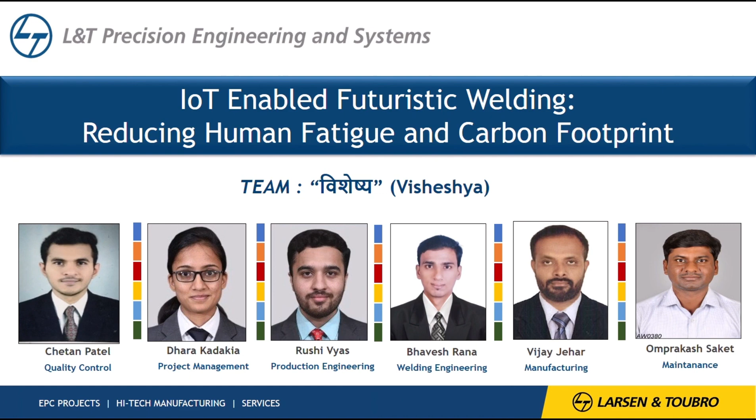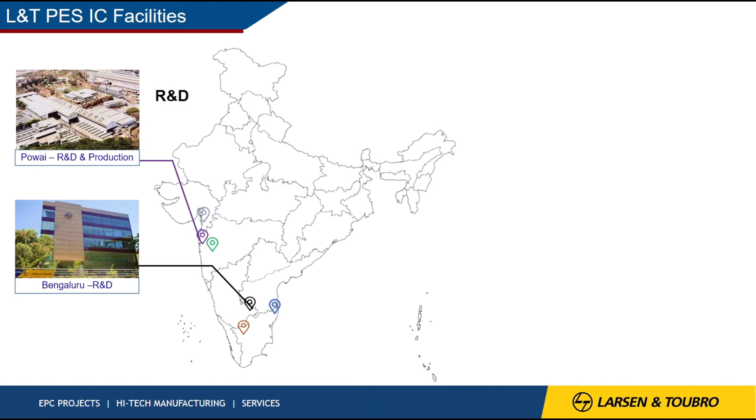issues. L&T is a professionally managed multinational EPC, which comprises multiple business verticals across many domains. Some of them are infrastructure, energy, high-tech manufacturing, information and technology, financial services and many more. L&T is majorly held by public institutions and has generated revenue of 26.7 billion United States dollars in financial year 2024. L&T Precision Engineering and Systems IC is located across pan-India locations.

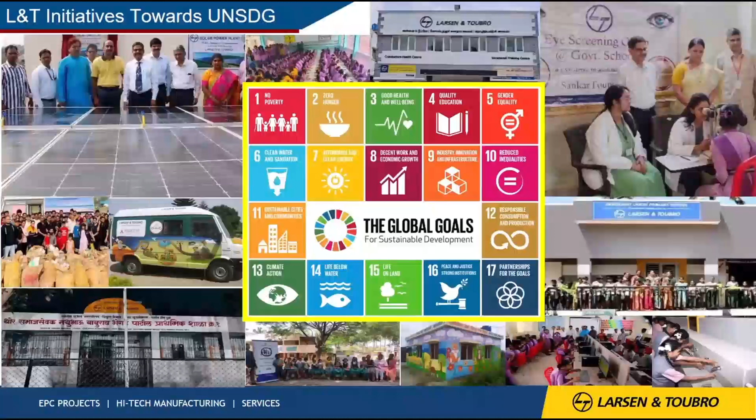Our team is from Hazira, situated in Gujarat state, which is the largest manufacturing plant of L&T in India. L&T contributes widely to the social and governance causes, adopting various practices in order to uplift the community at large. We are also targeting to be water neutral by 2035 and carbon neutral by 2040, thus representing our commitment towards our vision of building a sustainable environment.

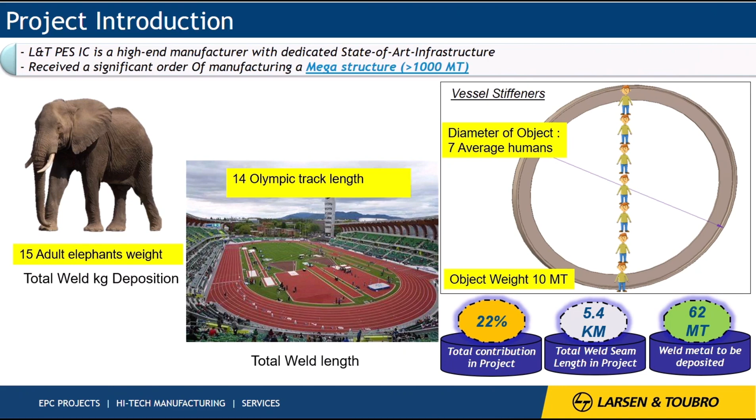We have targeted 3 sustainable development goals by executing this project, which are good health and well-being, industry, innovation and infrastructure, and responsible consumption and production. L&T Precision Engineering and Systems IC is a high-end manufacturer with dedicated state-of-the-art infrastructure. We had received a significant order to manufacture a megastructure, whose weld quantum is equivalent to 15 adult elephants, comprising a total weld length equal to 14 Olympic track lengths.

The T-ring vessel stiffeners are the main load-bearing members of the structure. The major task here was to perform welding of vessel stiffeners. Using the conventional method of manufacturing for 200 stiffeners, we would have required 1,650 days. This may have caused issues like dimensional inconsistency, high manual interventions, high probability of rework, and delivery delays due to non-value-adding activities like chip-back grinding and the requirement of highly skilled manpower. The core target for the team was to obtain necessary customer approval for the implementation of a new methodology and reduce the cycle time by 30%.

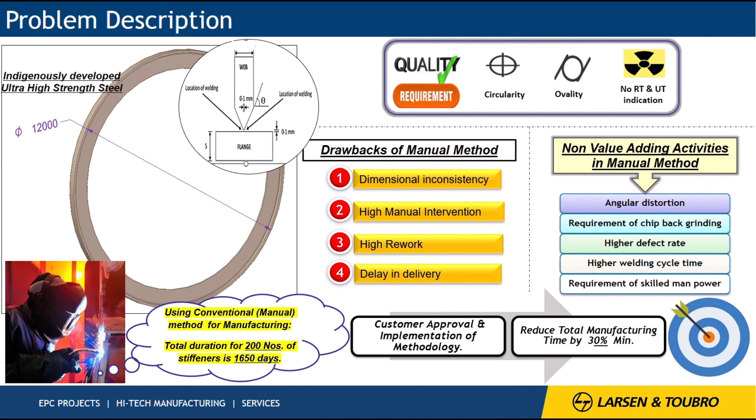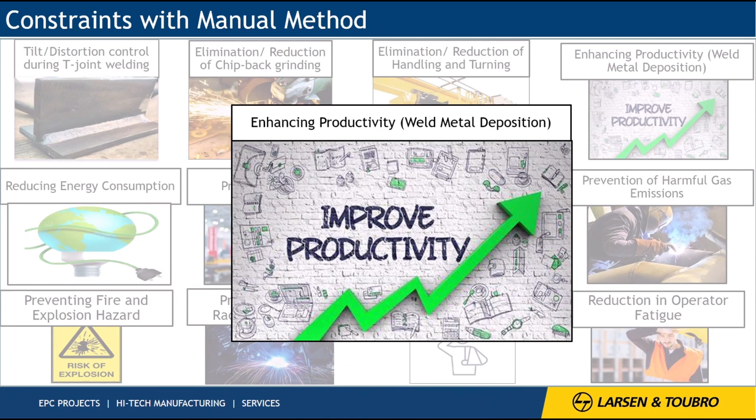The constraints of the manual method of manufacturing are: inconsistent weld deposition leads to abnormal tilt and distortion of the stiffeners. Root gouging is essential and leads to a higher cycle time. It requires back and forth turning to perform sequential welding on both sides of the T-joint. Hence, day-to-day productivity targets cannot be achieved. Performing preheating using gas burners consumes more energy. Skilled welders are required to eliminate chances of rework, hence process de-skilling is not possible. It is also not possible to control the process remotely with manual welding.

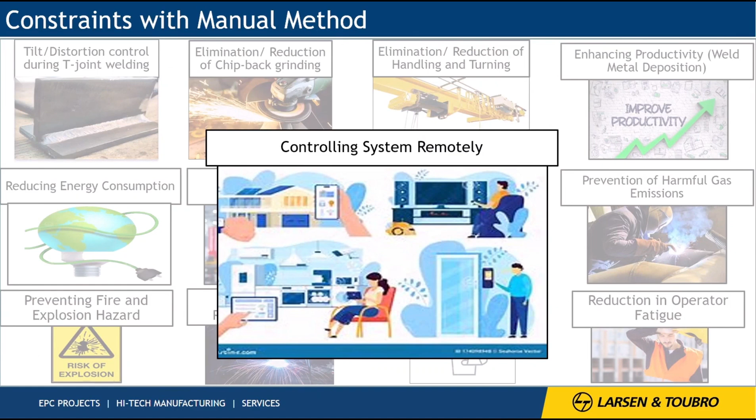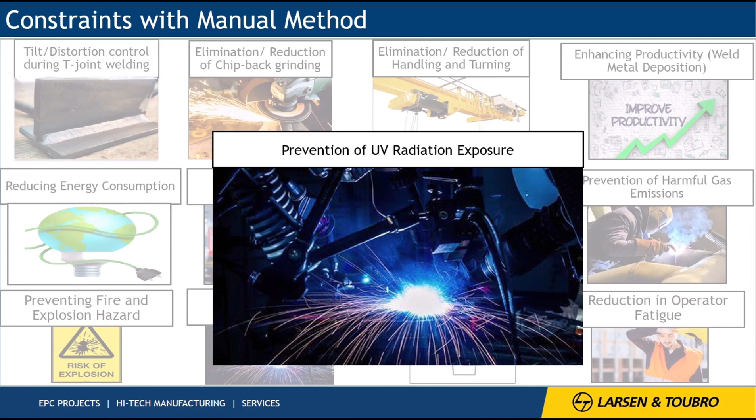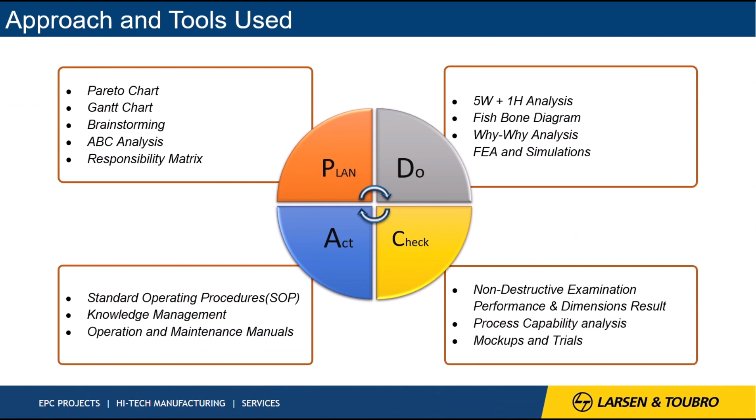This leads to the emission of harmful weld gases. Continuous preheating carries the risk of gas explosion. The manual method of welding exposes workers to UV radiation. The involvement of physical presence may lead to human injuries, and higher operator fatigue due to continuous contact. Attending all these issues was a complex task. To cater this in a structured manner, we adopted the PDCA approach.

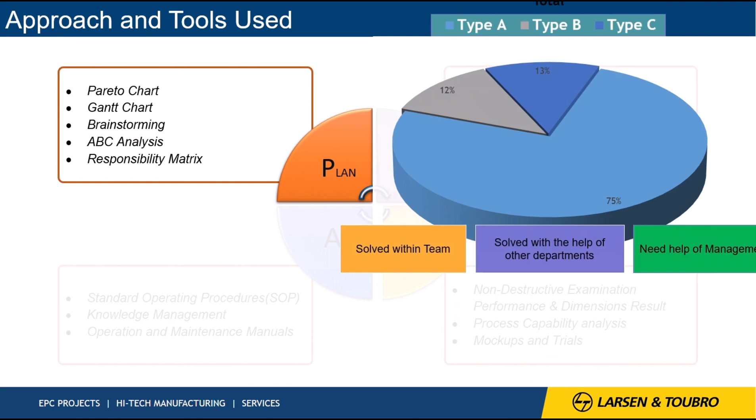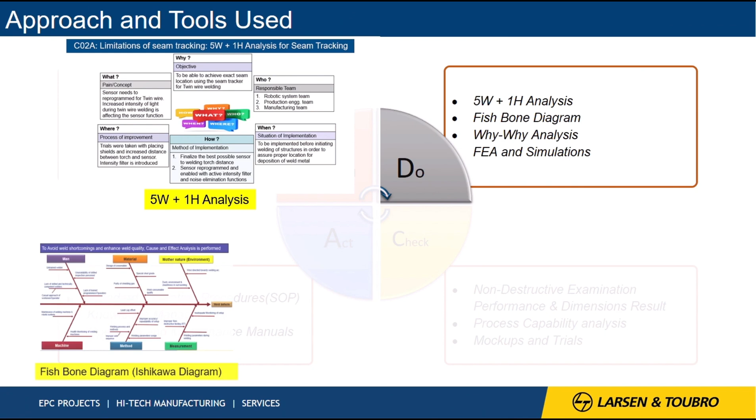In plan phase, we used QC tools like Pareto, Gantt chart and brainstorming, which enabled us to focus in the right direction. Further, tools like ABC analysis and responsibility matrix narrowed down our interest. In do phase, we used tools like 5W+1H analysis to find out limitation of seam tracking. Fishbone diagram was used to identify root cause of weld shortcoming. Why-why analysis was used to eliminate concavity and reinforcing welding requirements. FEA analysis was implemented to validate the structural design.

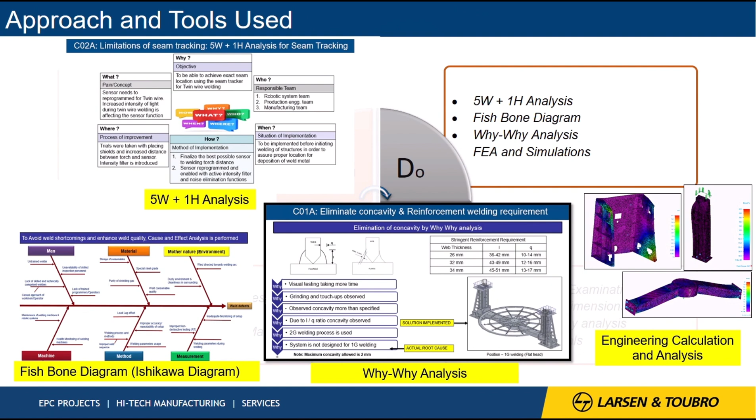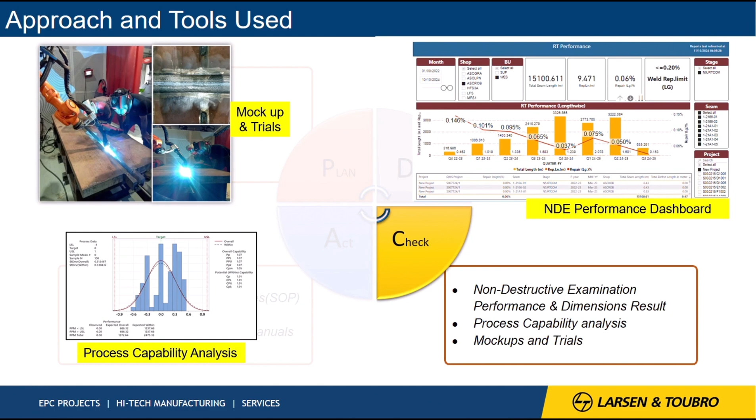During check phase, we measured the NDE performance and progressively performed mock-up trials. We had also performed process capability analysis to ascertain performance of our proposed solution. Under the act phase, we had prepared standard operating procedures and processes to sustain best practice to be followed. Our team focused on reducing carbon footprint and minimizing human fatigue.

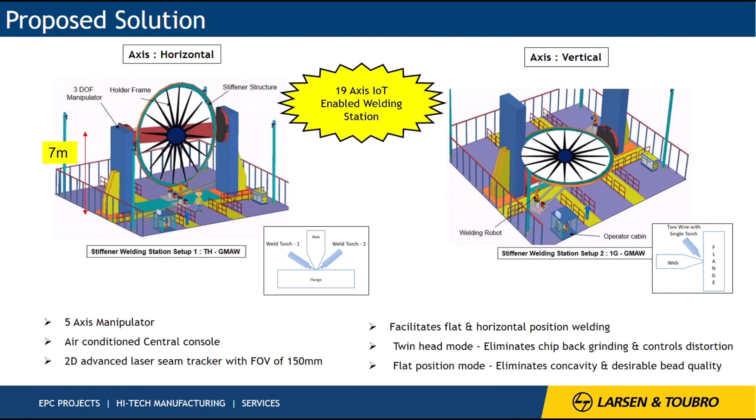We identified challenges with gas metal arc welding and, after extensive brainstorming, designed a special-purpose machine with advanced features to address these issues. This machine is known as Twin Head Tandem Gas Metal Arc Welding System. Let us see the reasoning behind this name and delve into the unique capabilities it offers. The entire system is designed by in-house team of Larsen and Toubro. Aligned with the UN Sustainable Development Goals, this special-purpose machine features a twin-wire process to increase deposition rate and reduce cycle time.

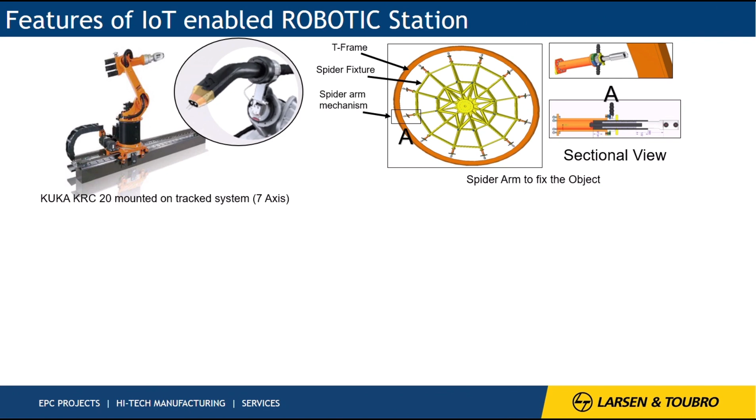It has a spider arm fixture for handling large objects up to 12 meters in diameter with precision and safety. Additionally, it includes a 2D laser tracking system and HD cameras for remote monitoring, enhancing precision and protecting operators from UV radiation. This system features a dedicated control cabin for remote operation by a single operator, enhancing safety and comfort. Advanced analytical tools streamline monitoring and decision-making.

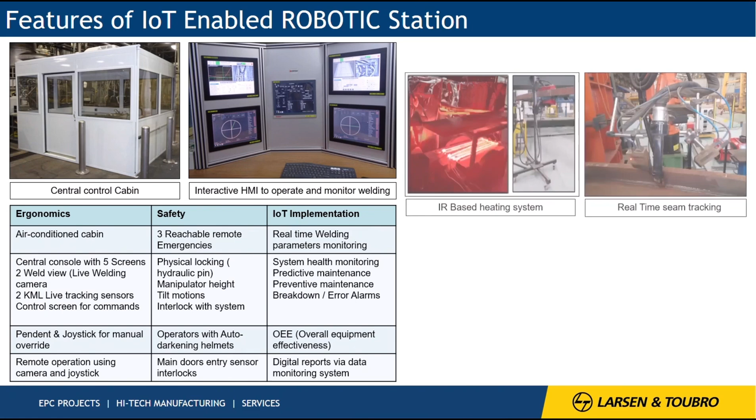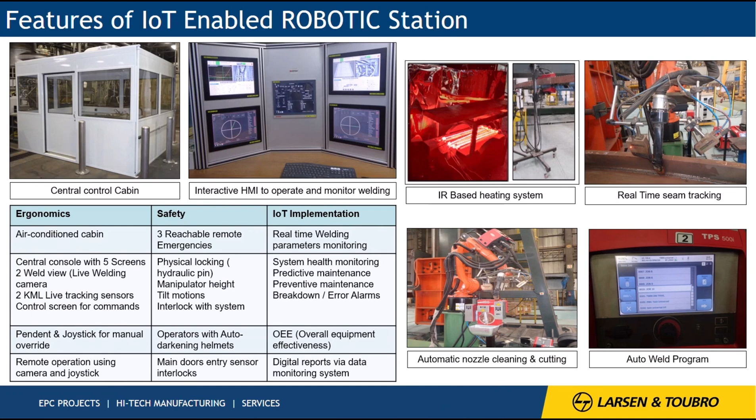To reduce carbon footprint, an electricity-based infrared heating system replaces traditional gas methods, aligning with UN SDG objectives. Automated cutting and grinding processes further improve safety and efficiency by eliminating manual intervention in hazardous tasks. L&T is proud to be the first in India to develop such a unique and advanced system.

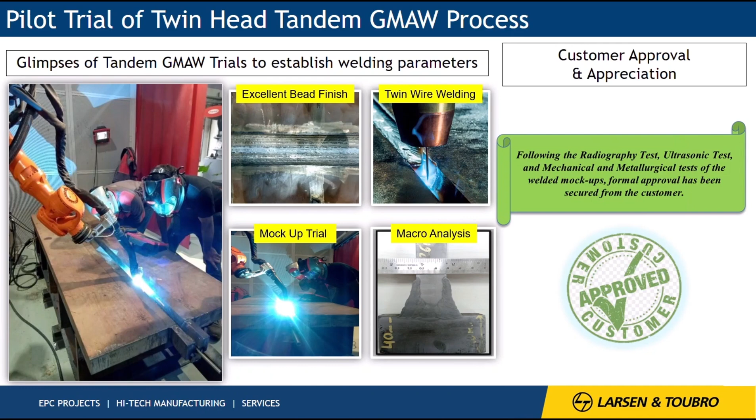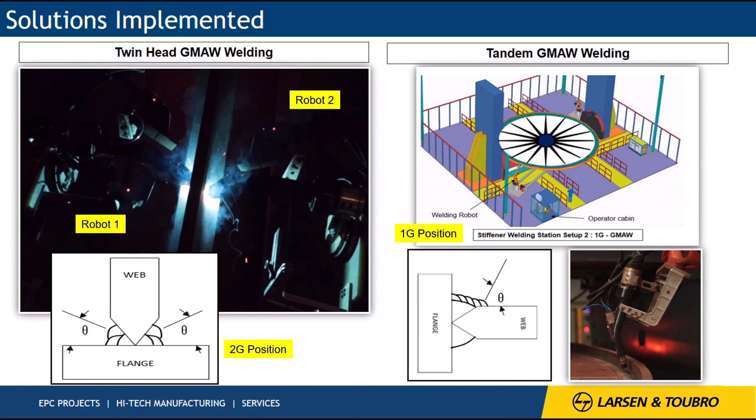On the right, a flat position welding setup is significantly boosting productivity. The entire system can handle and rotate large objects within minutes, hence dramatically reducing human effort. It is important to highlight once again that the system is operated remotely, minimizing human fatigue and protecting operators from harmful radiation and gases. As mentioned earlier, there were 12 challenges which were to be tackled.

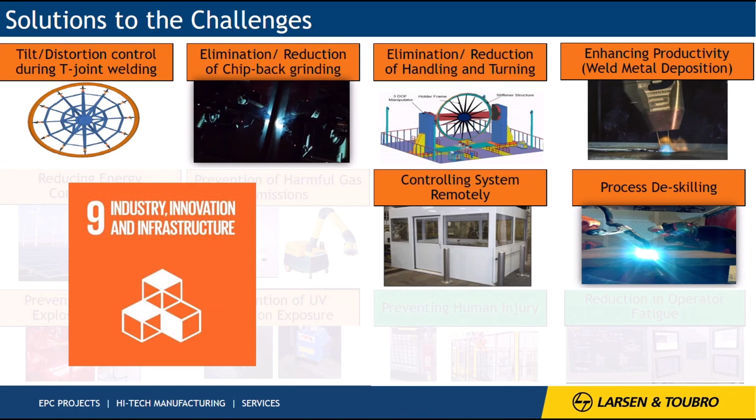These challenges can be put into 3 different categories. Each category signifies a UN Sustainable Development Goal. Goal number 3, Good Health and Well-being. Goal number 9, Industry, Innovation and Infrastructure. Goal number 12, Responsible Consumption and Production. With the aid of QC tools and other techniques, solutions to all 12 problems were identified and implemented.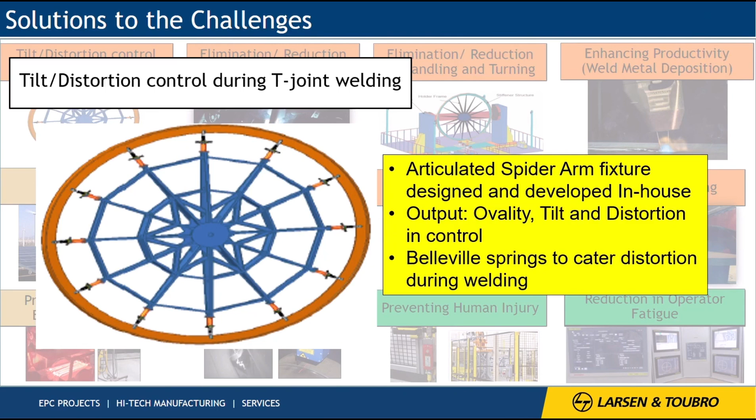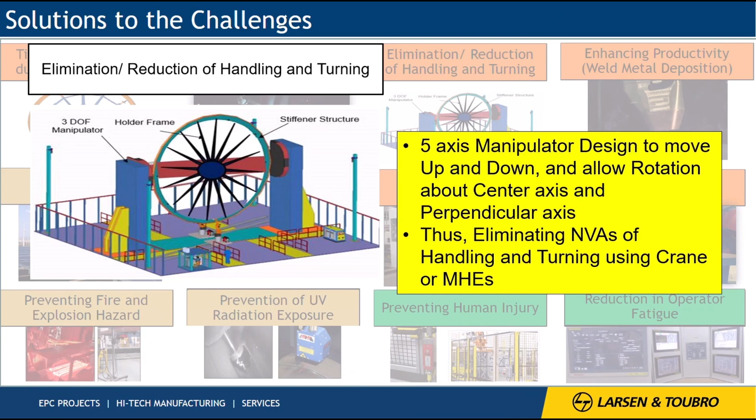Number 1. Tilt and distortion control was achieved by using a spider fixture with Belleville springs to cater to the weld shrinkages. Number 2. Chip back grinding was eliminated by implementation of twin head welding. Number 3. Turning and lifting is a huge non-value added activity which has been eliminated by using multi-axis manipulators and positioners. Number 4. Weld kilogram deposition was doubled and productivity was enhanced by using a tandem welding arrangement with 2 wires in leading and lagging position.

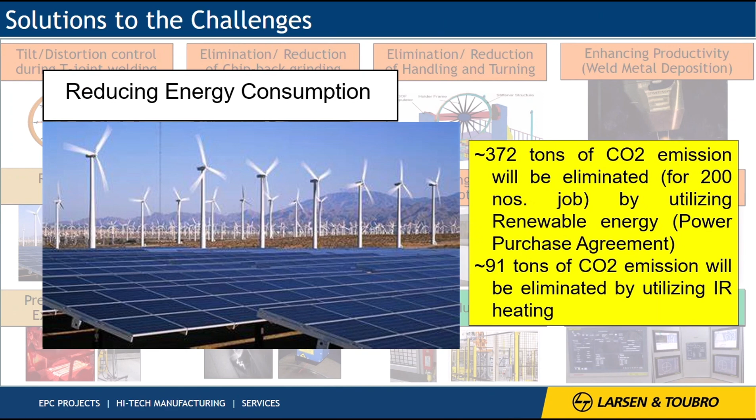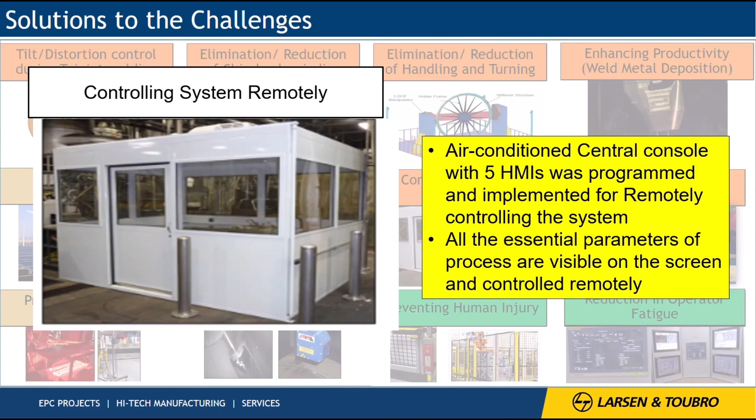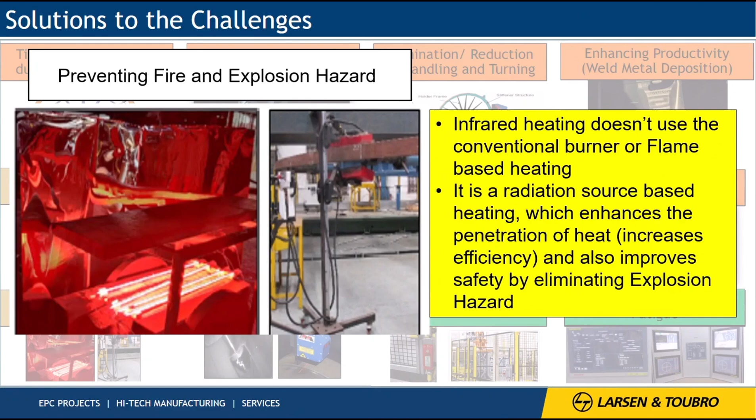Number 5. Consumed energy was generated by solar and wind renewable energy alternatives. Number 6. Harmful gas emissions were avoided by using infrared-based heating. Number 7. The complete system was remotely controlled by an AC cabin with operation consoles. Number 8. Deskilling of the complete process was done by using robots with customized programs. Number 9. Fire and explosion hazard was avoided by using electrically operated infrared heating.

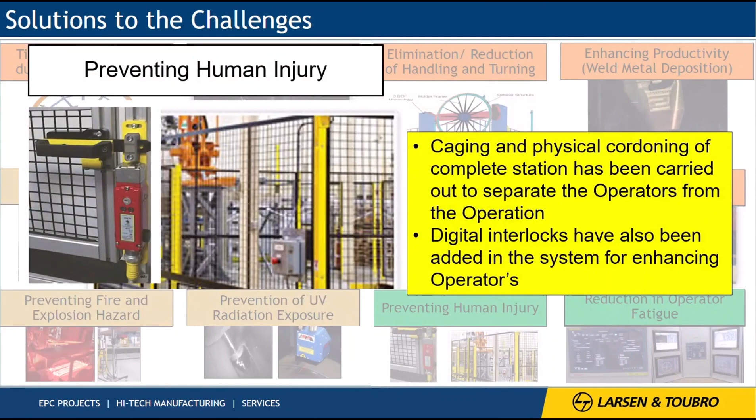Number 10. Ultraviolet exposure was prevented by using 2D laser sensors and motor drives. Number 11. Human injury was prevented by caging and digital and physical interlocks. Number 12. Operator fatigue was avoided by implementation of a SCADA system. Overall business impact is 0 incidents throughout the journey, 99.94% FTR in quality, 60% cycle time reduction in productivity, 12.31 million rupee saving in cost.

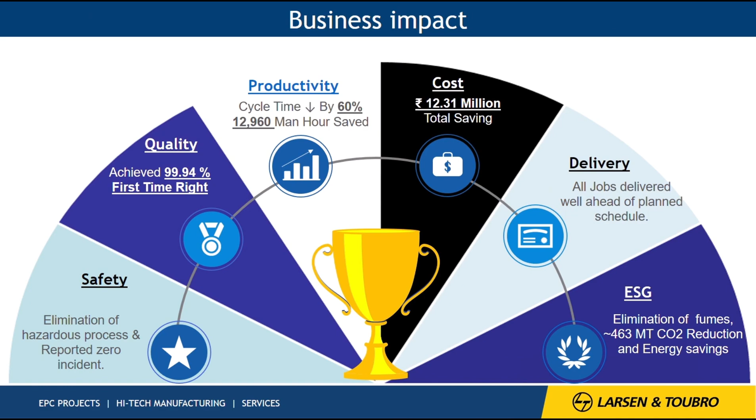Thank you. And thank you for the presentation and the application. Just looking at the time, we have 5 minutes for questions. Anyone have a question? If not, I will start with my question.

There's mention about reduction of CO2, and I think in the video you also showed wind and solar energy as being used. However, I thought that you reduced it through buying your energy from other sources. Is that a correct interpretation?

Good evening from L&T Precision Engineering and Systems. Sir, a very good question. Actually, there are two things from which the CO2 emissions have been reduced. The first being the renewable energy that was used for the input energy consumed for the system, as you correctly mentioned. We got the input energy as renewable energy. Second was by replacing the burner or conventional heating with electrical infrared heating.